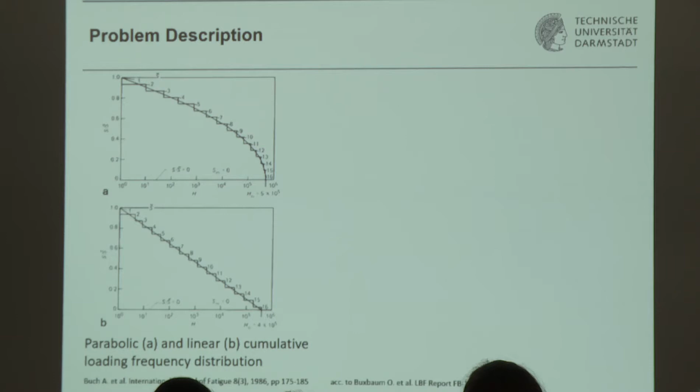The problem at that time, and still today, is: if you have a variable amplitude loading sequence characterized by, for example, cumulative spectra of exceedance of some levels—maybe a parabolic shape, which is common in the automotive industry, or a so-called straight line shape, characteristic for example of offshore applications—then you may want to perform a prediction of crack initiation life with a local strain approach.

At that time, and still now, you see results which are detrimental in terms of the predicted number of cycles to crack initiation compared to the experimentally determined cycles to crack initiation. Looking at these bars, you find factors in a good case of 2 on the non-conservative side, going up to more than 10, approaching 100. The situation is a bit worse for the straight line distribution than for the parabolic distribution.

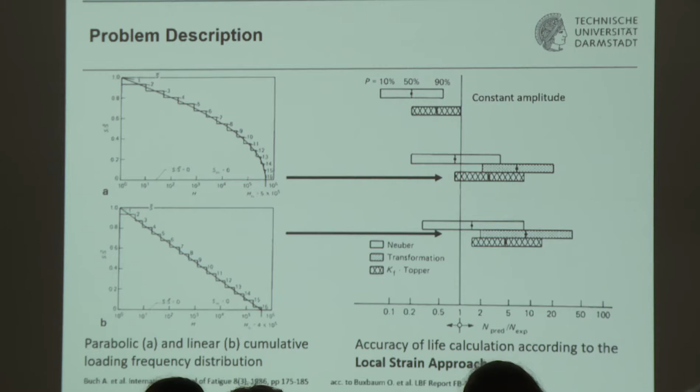An even older idea is to ask whether fracture mechanics is a better approach to arrive at more accurate predictions of lives to crack initiation.

The simple idea is to use the Paris-Erdogan simple law of crack growth and perform crack growth calculations. If you do so, starting at an initial crack length, you get the well-known crack growth curves. If you apply a high amplitude to your structure and material, you end up with a short life to fracture. Fracture here is defined as a given and constant crack length.

In my application, it's a crack initiation of a millimeter or so. If you apply a low amplitude, sigma A3, your life is obviously longer, ending up with a longer life N3. You can plot your lives against the applied amplitudes, and this is the conventional stress-life curve, the constant amplitude stress-life curve.

This is easy to perform, and once you can do these calculations, you can apply the idea to a variable amplitude loading situation. Start, for example, with large amplitudes, calculate the number of cycles applied, and arrive at a crack length. At that crack length, you may shift to a low amplitude and apply some cycles, N3.

You may want to go back to an intermediate value of cycles or amplitudes, and you get another number of cycles until failure is reached.

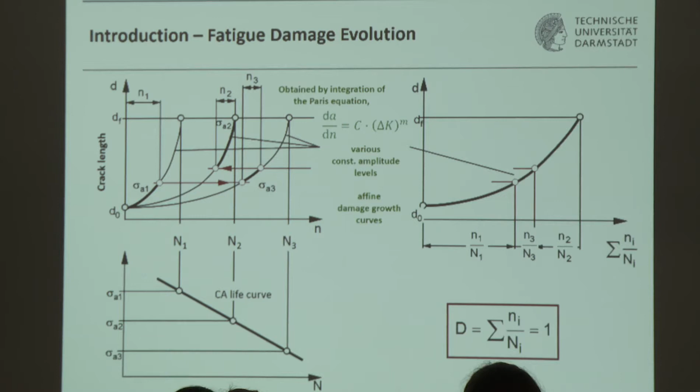So what else could we do? Sequence effects and all these things must have other physical reasons, and this is what we are trying to cope with in our extensions of these damage accumulation calculations. Why should we be motivated to take this subject up again in our considerations?

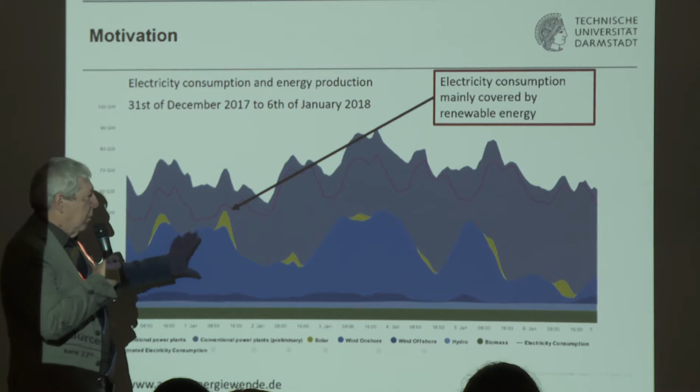If you wait an hour or two, you need a detrimental amount coming from conventional, nuclear, or whatsoever power plants. As we feed renewable energy into our grid systems, this has the consequence that power plants are operated very differently than they were designed for. There are many more cycles coming from many more start-stop cycles and intermediate lowering and increasing of energy.

And there is a certain fear of not having designed power plant components in an appropriate way. Some people wanted to know what is now the life of power plant components under these new load sequences - never thought that components should suffer under these conditions.

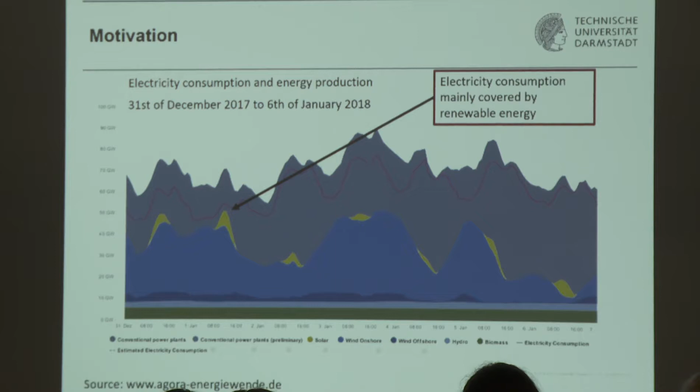For example, this spectrum consists of roughly 100 cycles with a large amplitude. The amplitudes are normalized here - this is the largest one. And there are roughly, per large cycle, 100 smaller cycles with smaller amplitudes. So that's what the spectrum looks like - something in between a straight line distribution and a parabolic distribution, which I showed in my first figure. The number of cycles in each step you can take from this table.

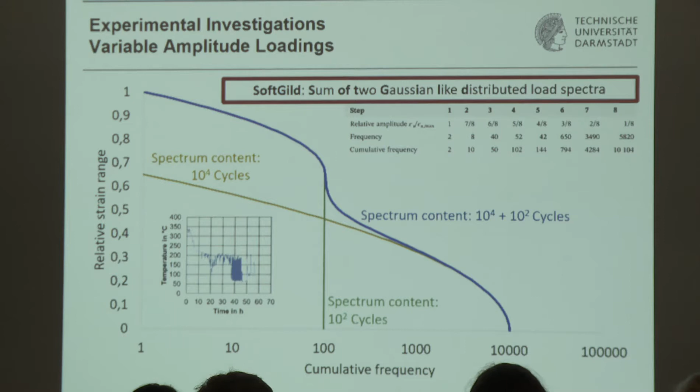Coming back to fracture mechanics and fatigue crack initiation, it is well known and a good idea to study what has happened before a crack has initiated. Other than what we just heard about brittle fracture, we know that arriving at a technical crack of a millimeter size or so means there has been crack growth in the stage before that.

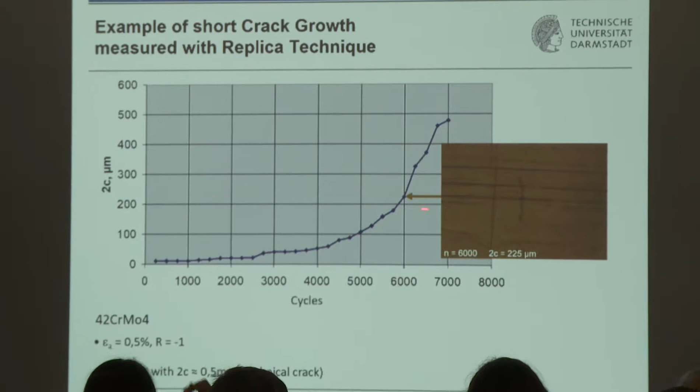If you are lucky enough to have identified photographs of the site of crack initiation of a technical size from an earlier stage of life, you will be able to simply identify that this crack has been there for nearly the complete lifespan.

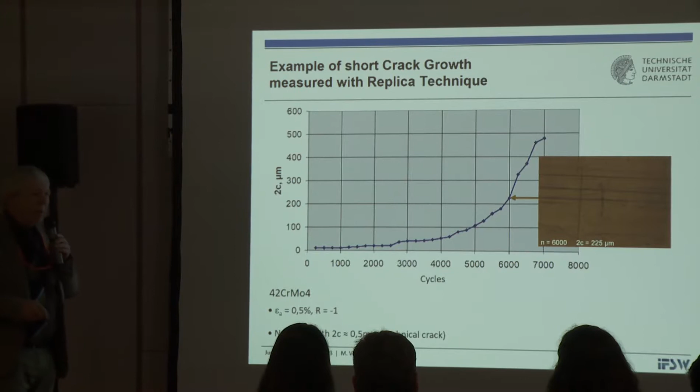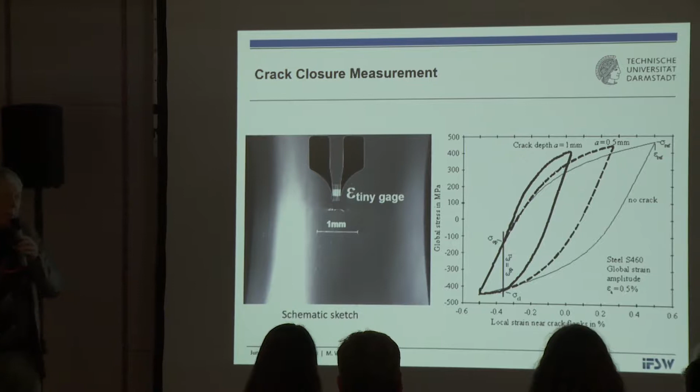I'm very much in favor of accepting that there is crack closure and crack opening. Crack closure and crack opening, as we understand it, is one driver of our nonlinearities and sequence effects, especially in this stage, but also in the long crack stage, which I'm not really talking about today.

In this schematic sketch, you see an initiated crack of nearly 0.5 millimeter or so. What we did is mount a strain gauge as closely as possible behind this crack, and monitored what happens if you apply to this material, under global strain control, some elastic-plastic deformation which causes this crack to initiate and grow.

On the right-hand side, without a crack you would produce a conventional hysteresis loop, the way hysteresis loops normally look. However, if you have a crack growing, these hysteresis loops deform, especially in the tensile half of a cycle - the strains measured by this tiny gauge become smaller and smaller the larger the crack grows. In the compressive half of the cycle, this lower reversal point remains unchanged, as if no crack were there.

You will be able to identify locations where these loops deviate from one another and where they come together, one loop branch here. We are totally sure that at that position the crack flanks lose contact, and they gain this contact again at that position. So we draw a vertical line here, and this line discriminates in these loops those states where the crack flanks are in contact and those states where they are no longer in contact.

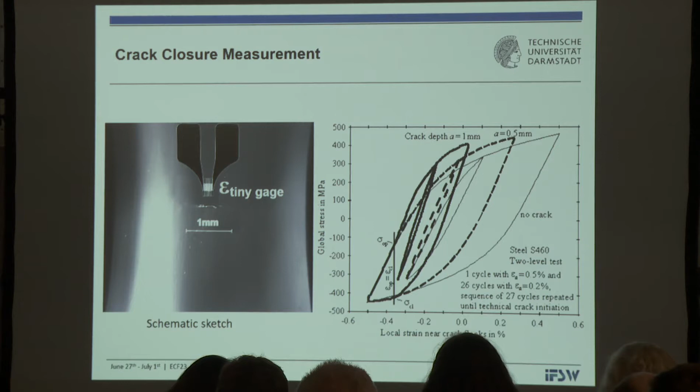Keep this figure in mind, because now I perform a variable amplitude loading, which consists of a large cycle as seen previously, 0.5% amplitude, interspersed with small cycles of an amplitude of 0.2%, which we saw just before. If you look at the measuring signal, you see that these small cycles during their complete range are totally open, and the total range can apply or can cause fatigue crack growth, such as it is. This is a sequence effect occurring in this stage.

For the crack driving force, we have chosen to apply Dowling's version of the cyclic J integral, and there are nice formulas so simple that you can perform calculations even for a million cycles. This formula applies for a semicircular crack in an infinite body, and it consists of the part in brackets where mechanical quantities like stresses and strains appear, which are the stresses and strains in the situation without a crack, and A is simply the radius of this semicircular crack.

So there are two factors: a crack length related factor, and a factor from mechanics which does not contain any crack dimension, which we call the damage parameter in brackets, similar to the Smith-Watson-Topper damage parameter. We call it P index J, based on a cyclic version of the J integral. These two components can be attributed to strain energy densities in the uncracked situation, as shown in these colored lines.

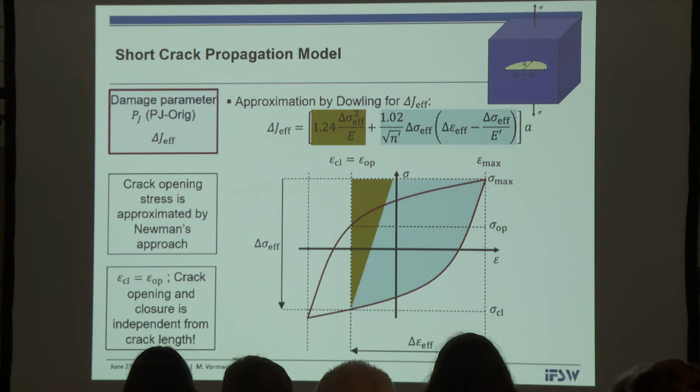I should mention that the crack opening stress here is taken from Newman's approach, Newman's well-known equation. Just to repeat, we identify opening and closing along a vertical line. So we have only one history variable in our simulation, and this is the current location of the crack opening strain.

The sequence effects come in a way that, for example here in this animation, there is a large cycle. This large cycle determines where the crack opening strain is positioned. If you have this large cycle followed by smaller cycles, these hysteresis loops produce new crack surface, and this new crack surface can move the crack opening strain more or less slowly or quickly, and this has to be determined to a position associated with the smaller cycles themselves.

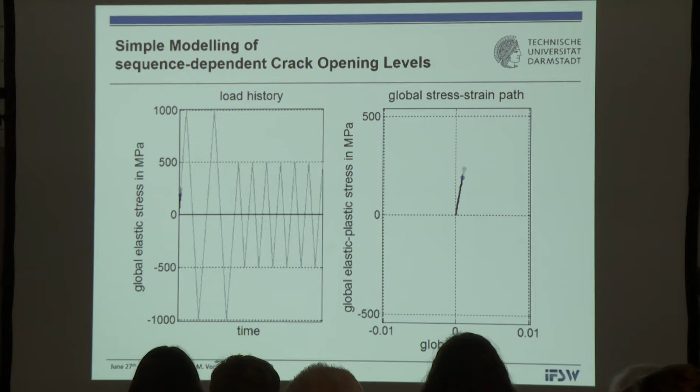So as I said, the crack driving force is the J-integral, with a power law similar to the Paris law, now formulated in delta J. Keep in mind that the damage parameter is simply delta J divided by A. The crack is assumed to start at an initial crack length, you define the final crack length, and then you can integrate that power law.

If you integrate that power law and normalize the crack growth curves by the end value, you again end up with an affine crack growth curve or damage growth curve, which means that in this case you can apply linear damage accumulation, now expressed in terms of constant amplitude life curves in terms of J, of this PJ parameter.

One extension is related to the threshold behavior. We introduce the threshold in J, and we decide whether a cycle providing a delta J larger than the threshold contributes to damage and crack growth, and if it's smaller, it does not. This means that with increasing crack length and damage, the endurance limit of the material and the component is continuously decreasing.

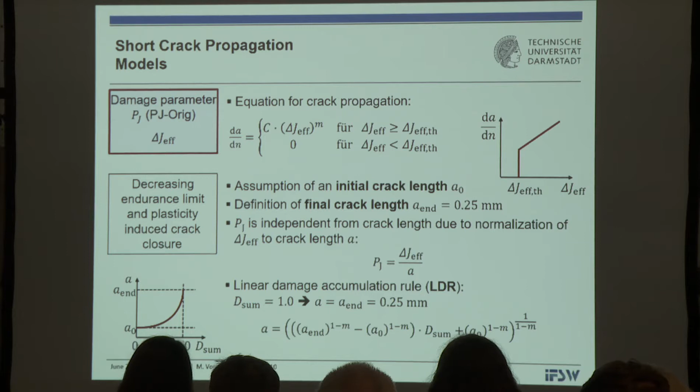So now I come back to our investigation of the current project I'm reporting on. These are the specimens which we tested: unnotched hourglass and smooth specimens, specimens with a notch, and even welded joints. I have to appreciate the work of our co-workers at the Fraunhofer Institute for Mechanics of Materials in Freiburg, who did a lot of the experimental work and their own modeling, and they will report that at another occasion. I took their experimental results and performed calculations - not I, Alexander Bosch did that.

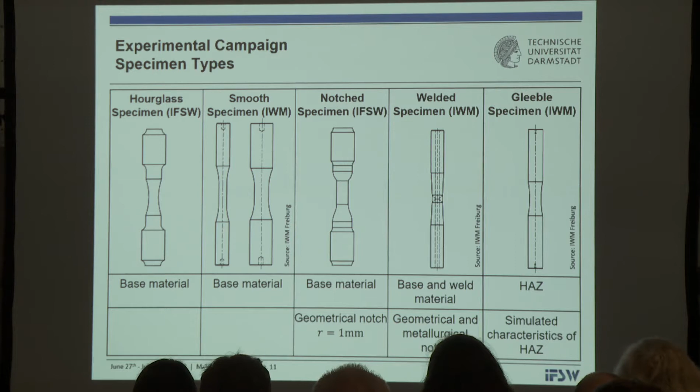Finally, we performed a lot of two-step tests consisting only of a large cycle, large amplitude, followed by a number of small amplitudes, either at the upper reversal point, the lower, or somewhere in the middle. We varied the amplitudes of the large and small cycles - especially the small cycle amplitude was chosen to be either just above the endurance limit or just below it. The number of these cycles was also varied between 10 and 10,000.

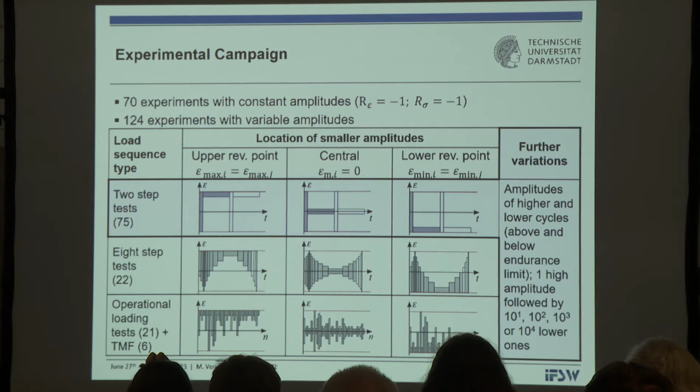So finally, this campaign had 70 experiments with constant amplitude loading and 124 experiments under variable amplitude loading. The constant amplitude loading provided us with SN curves, the notch effect, and the cyclic stress strain curve, and all these things which you must know in order to perform such calculations - also the cyclic hardening and softening of the materials, and whether there is Masing behavior or not.

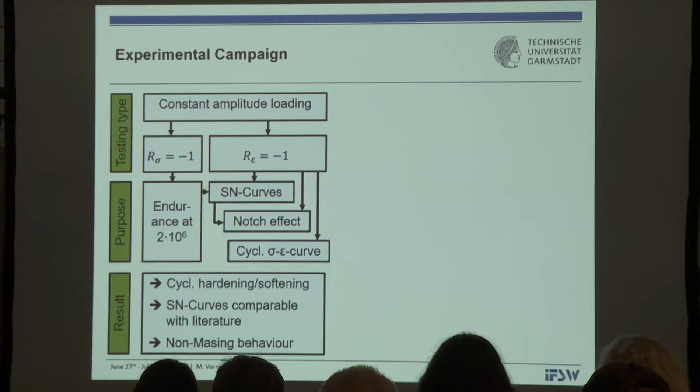The variable amplitude loading data was taken to validate various damage models, and some of them I will report in a few minutes. You remember two-step tests, ordered 8-step tests, and random operational loading tests. Again, we measured cyclic hardening, mean stress relaxation, and Miner's rule damage values, which go down to values of 0.1 only, meaning a factor of 10 on the unsafe side.

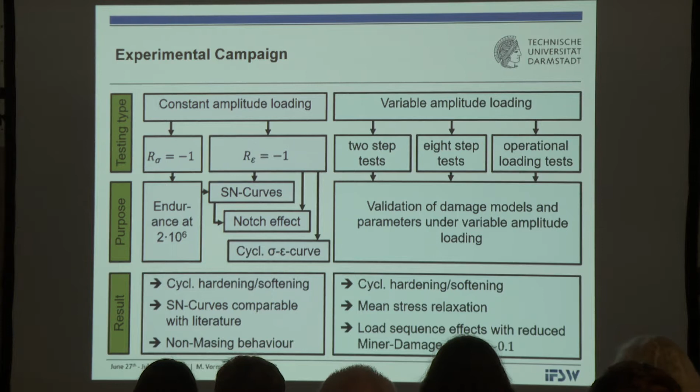I should mention that not only what I explained a minute ago - this PJ approach - has been performed by others also. I won't have time to go into details here, but I should mention that our research partners in Freiburg very much rely on their damage parameter. The main difference is that they say the crack driving force is the cyclic version of the crack tip opening displacement, and we say it's a J integral. But there are relations between both, and the differences are not too large.

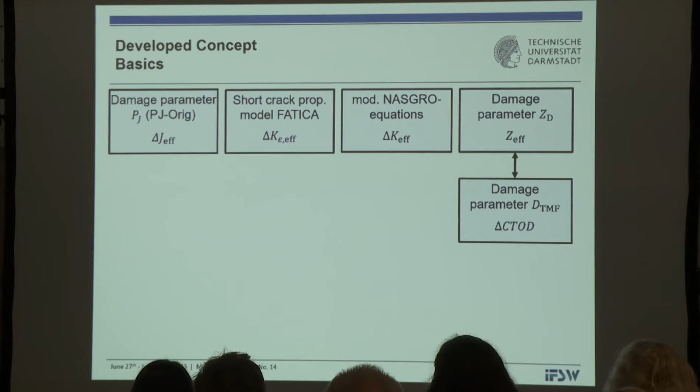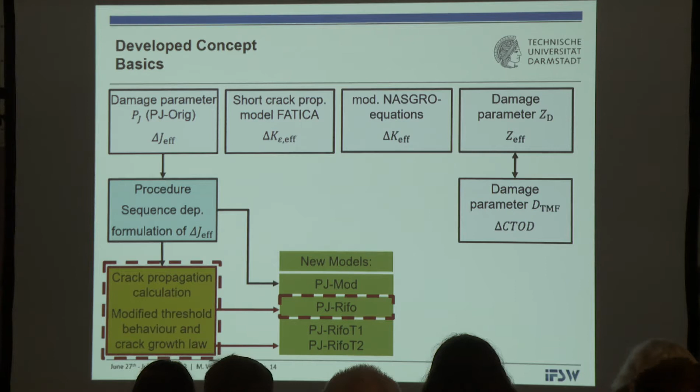So we developed new models - new models were introduced in that way that we now perform real crack growth integrations cycle by cycle, and no longer damage accumulation. When doing so, we could modify our crack growth law from the simple power law to a law which includes also the threshold in the crack growth rate calculation. This has some advantages because we no longer have this knee point in our crack growth rate equation, but a smooth transition from the nearly Paris regime into the threshold.

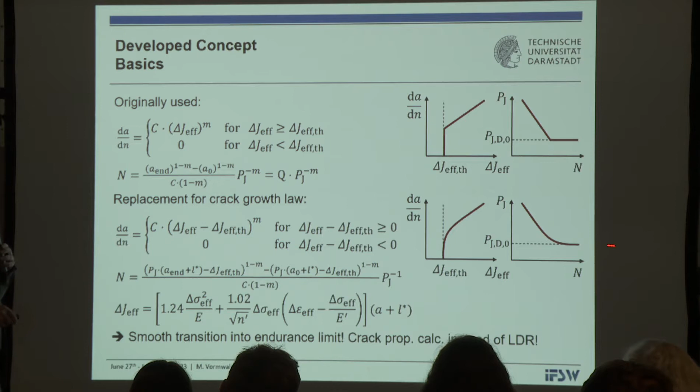This means that our life curves - constant amplitude damage parameter life curves - do not have a knee point, but a smooth rounding into the endurance limit. And these are the basic data. Here in this graph, I have also included the information on which material we have been working: an austenitic niobium-stabilized steel, which has been used very frequently in German nuclear power plants. As the power plants go off the grid this year, in this application it will no longer be used. So this is a well-known, well-tested material, and we know a lot about it.

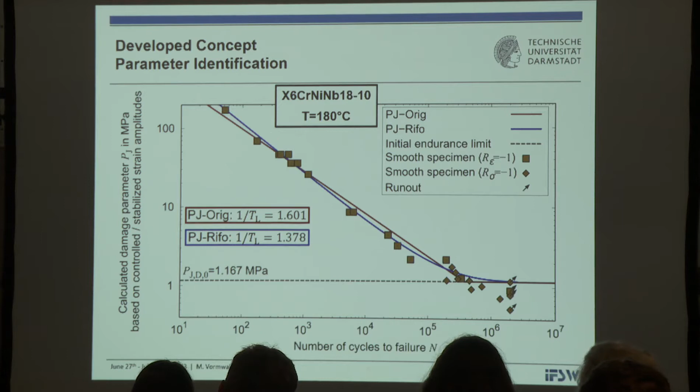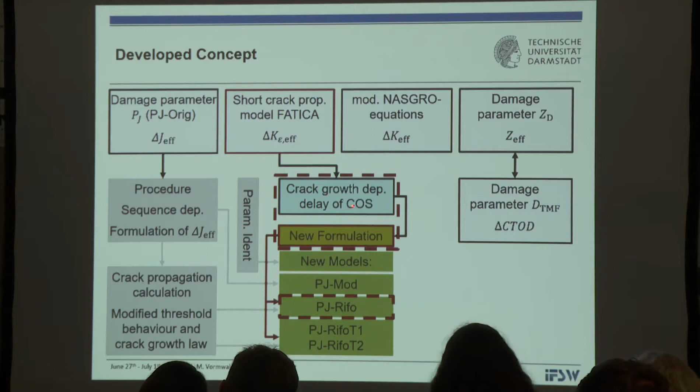So the main new thing we introduced is the crack growth dependent delay of crack opening strains. I'm going to explain this here.

So here in this sketch, we have a large cycle at the beginning, followed by a small cycle. The crack opening strain slowly approaches the value associated with a small cycle. In previous applications, we used an exponential law and a Miner-type damage contribution to model this curve, but this is physically not correct, so we shifted that and introduced that this curve of changing crack opening strains is associated with new build crack surface.

At the beginning, where the cracks are short, the buildup of new crack surface is very slow, and this curve is flat. In the later stages of life, with a longer crack, the new build crack surface will be fast, and with it, the approach to the new stabilized level will also be very fast. So this is the change.

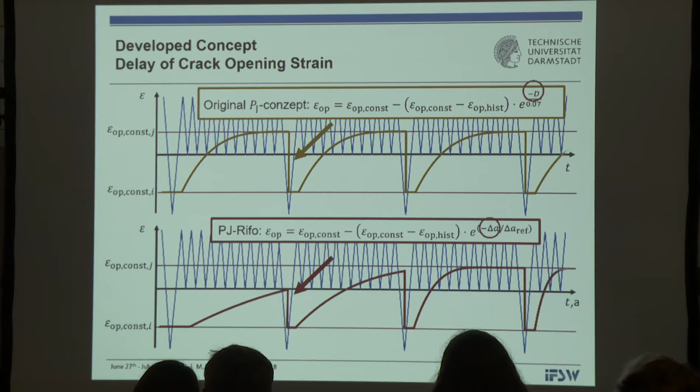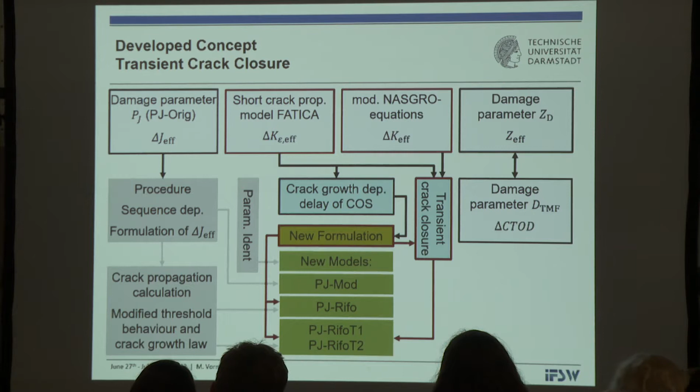So transient crack closure means that in the meanwhile, it has become clear that at the very beginning of crack growth, the crack is completely open. There is no crack wake. So this is only constant amplitude considerations.

However, if this process is taking place very quickly, then the effective ranges are decreasing also very quickly, and you end up with a situation that with the growing crack, the delta J integral is decreasing and it can fall below a threshold value, and then you have crack arrest. So this can be done in the modeling by introducing a simple exponential equation, and you can choose an appropriate reference length which steers how fast this approach is modeled.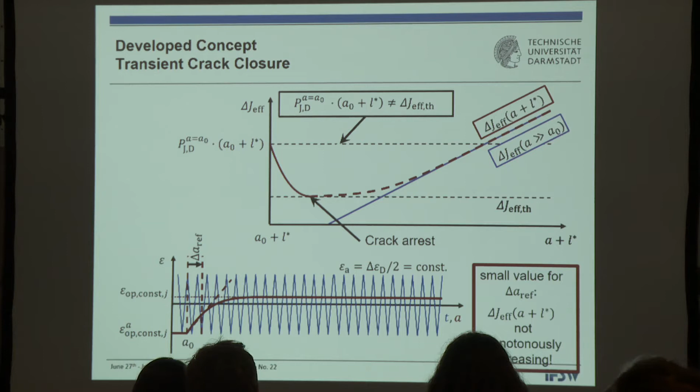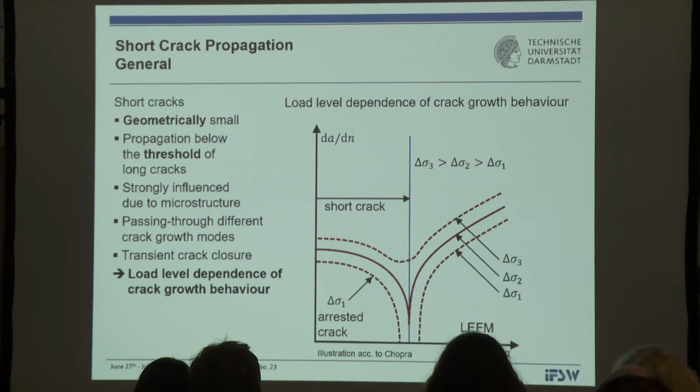So this leads us to the possibility that we can reproduce such well-known situations as shown here, that for example for short cracks you can find crack growth even below the long crack threshold, and the cracks come to an arrest, and sometimes if the amplitudes are higher you can pass this barrier. So this is now included in our modeling.

You may have seen that we have tested our material under 180 degrees Celsius, which is the mean temperature in the reactors, and the temperatures go up and down between 50 degrees and let us say 350 degrees. So the question was also concerning the temperature dependency on that crack growth. I will not focus on that. This temperature, having different temperatures for different ranges, will cause another sequence effect.

Taking this into account, we rely very much on the results of our research partners. Their postulate and hypothesis is that if you have a crack tip opening displacement, no matter what temperature is actually present in your material, you will have the same amount of crack advance. So the crack advance expressed in terms of the delta CTOD and the crack growth rate is independent from temperature.

And we took that assumption, and this leads us, where we are going to the delta J integral, to the necessity that we have to readjust our crack growth rate equations, because the yield stress or cyclic yield stress relating these both quantities together is of course temperature dependent.

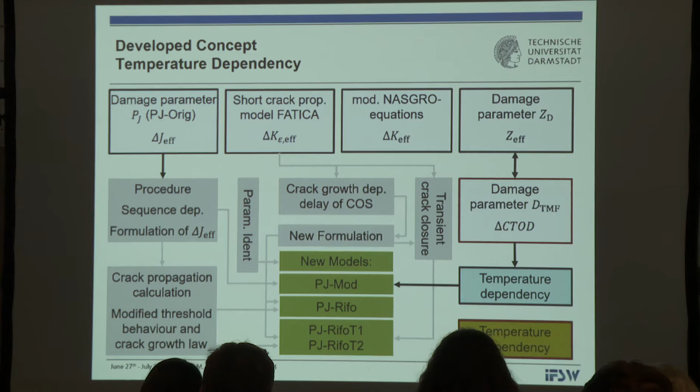So now this is the equational stuff. We performed a lot of calculations. We started with calculated stress-strain amplitudes using Masing-Memory behavior, conventional local strain approach. I will not show these results. They are as bad as they have been 35 years ago.

Then we took the real strain amplitudes from our test and assumed Masing. Accuracy is a bit better, but not reliable. Real strain amplitudes and corrected mean stresses - you remember that we have put our amplitudes to the upper reversal point and the lower reversal point. We are punished with mean stress relaxation effects.

If we take the mean stresses from the experiments, things are becoming better, and the only report here will be on the real strain amplitudes. No machine uncertainties in the control circuits, and other things are incorporated in our comparisons, and corrected mean stresses are taken into account, and this improved delay behavior of crack opening strains.

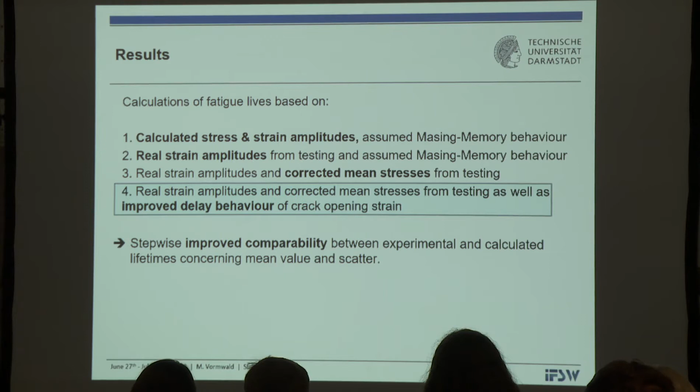And this is what I'm going to show now. I start with the distribution of these ratios of calculated to experimentally determined lives. Again, if the numerically determined lives are larger than the experimental ones, then you are on the non-conservative side.

Langer and Miner means this is the approach laid down in German rules on how to calculate variable amplitude life, as far as they told us. And this is, in the average, on the unsafe side. The mean value is 2.17, and this is our German scatter value. You simply go into this cumulative distribution at the value of 90% exceedance, take out the abscissa, and go in at 10% and divide these two values. If this value is high, it's bad, and if it's 1, it's perfect.

So PJ original, this is what I explained at the beginning of my talk, which is, by the way, now part of a guideline in Germany for mechanical engineers performing assessment of strength, the FKM guideline. Some of you might have heard about that. These two results have been expected. We know that this PJ modeling is conservative and reduces scatter a bit.

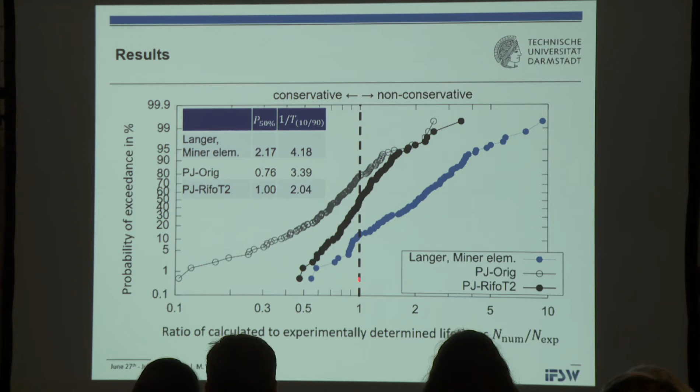I will replot in the next figure these numbers. Keep in mind this is 3.5 or something like that here, and this is 0.5. If I replot all these numbers, not on the abscissa but on the ordinate, and plot them over the number of calculated load cycles to failure, then I get these stars here, so this scatter band. But in this figure, I have also included constant amplitude testing results with these open squares, and there are some dots spread over there.

If I plot for these constant amplitude load cases the difference between number of cycles, numerical and experimental, this means scatter around the regression line of our strain life curve. So this is constant amplitude scatter here, going there, and this is variable amplitude loading scatter.

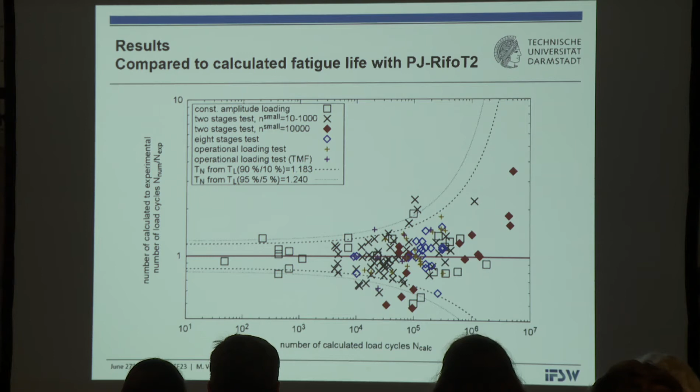My message is that what is scatter here is scatter in material, and you can only do a better job if you do a probabilistic approach and put everything which has been deterministic in my approach into some probabilistic framework. So it seems everything is solved, but this is far away from being so.

The notch effect we considered by simply taking generalized Neuber's rules and a notch fatigue factor. We did not deal with multi-axiality or thermomechanical loads. We did not cope with the problem of transient thermocyclic behavior.

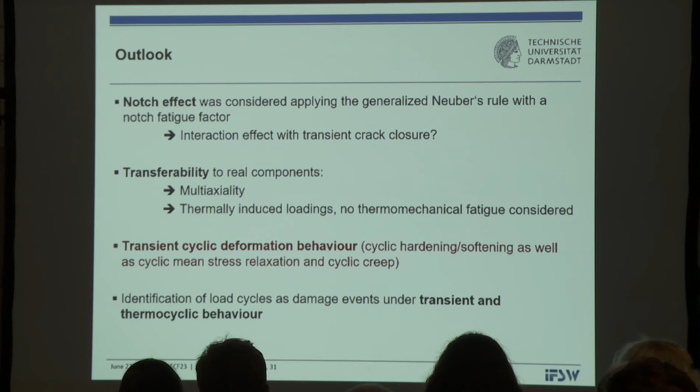What was astonishing for me is that if we want to arrive at highly accurate life prediction results, we have to use plasticity models which are able to take into account cyclic hardening, cyclic softening, mean stress relaxation, and this and that. It's not that we couldn't do that—we could, but it takes a lot of effort to include that in following up research work.

So what remains here? We have identified the sequence effect and taken it into account in our modeling. Threshold behavior is one, and the delayed behavior of crack opening strains is the other item. I didn't talk much about the temperature effect. As I said, in our final version, I think it is hardly possible to increase prediction accuracy for our batch of experimental results.

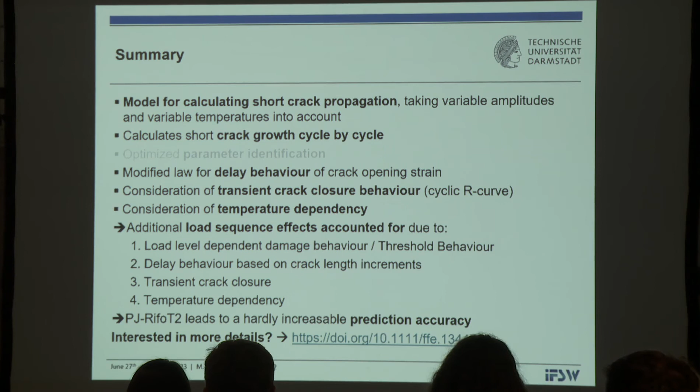And if you are interested in more details, there has already appeared one publication on that stuff.